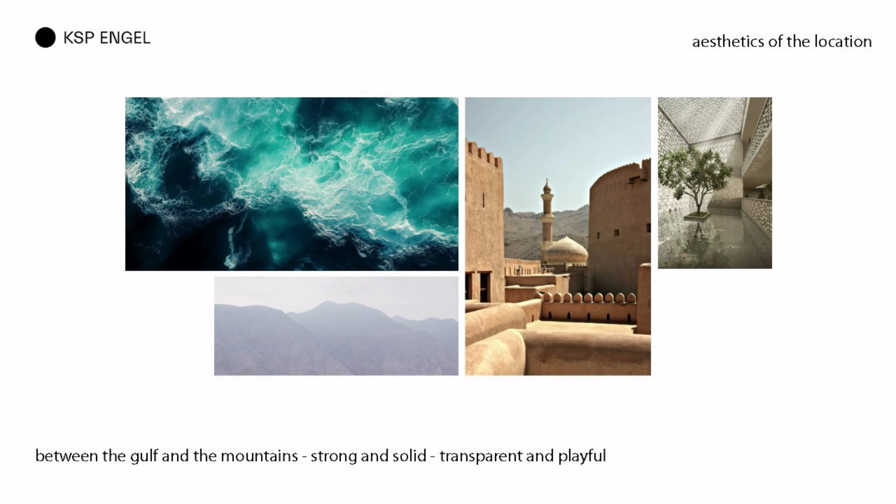We discovered that the buildings are solid and strong, but at the same time we have this Mashrabiya, which is delicate and playful with light and shadow. And we got inspired by these stones, which are so surprisingly different from the inside to the outside.

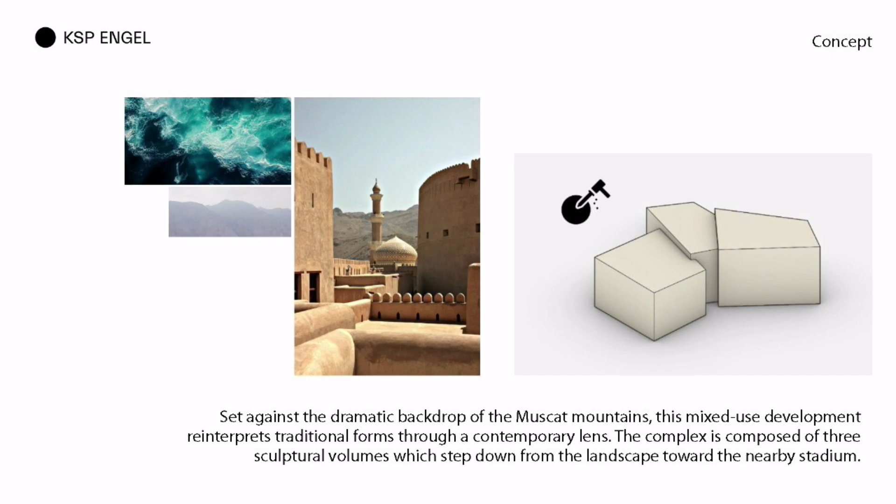We translated this into our concept. We first set, against the dramatic backdrop of the Muscat Mountains, the three volumes. They are stepped from the mountains toward the city, stepped back, creating a scenery, creating a skyline for the project.

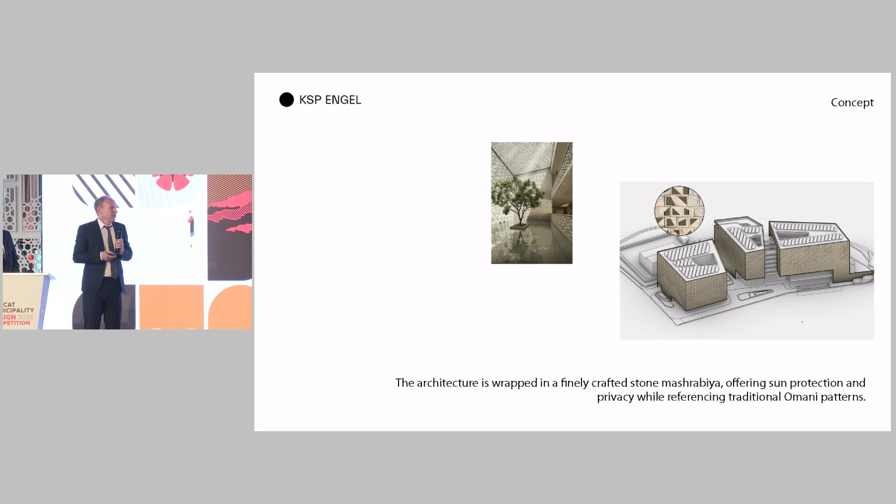Then, in contrast, the complex opens inwards, forming a generous courtyard that acts as the heart of the development, creating a quality of stay. Finally, we wrapped it with this crafted stone Mashrabiya, offering protection, creating an identity which from all sides looks very unique.

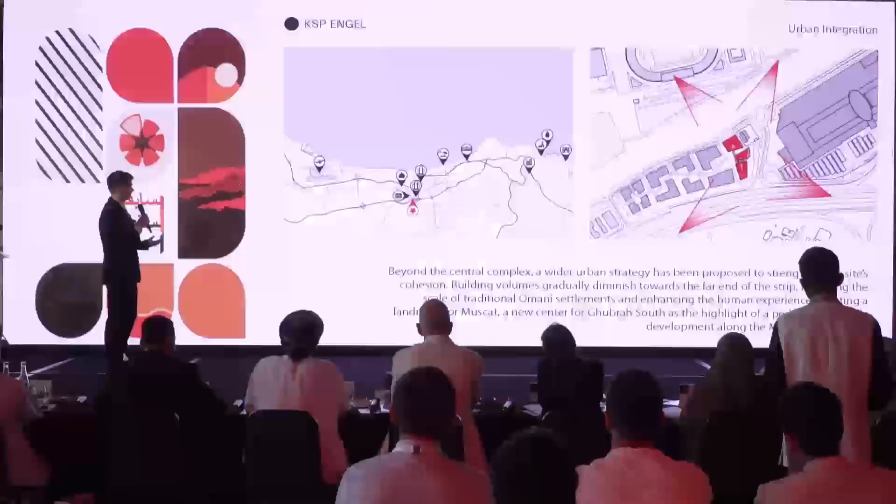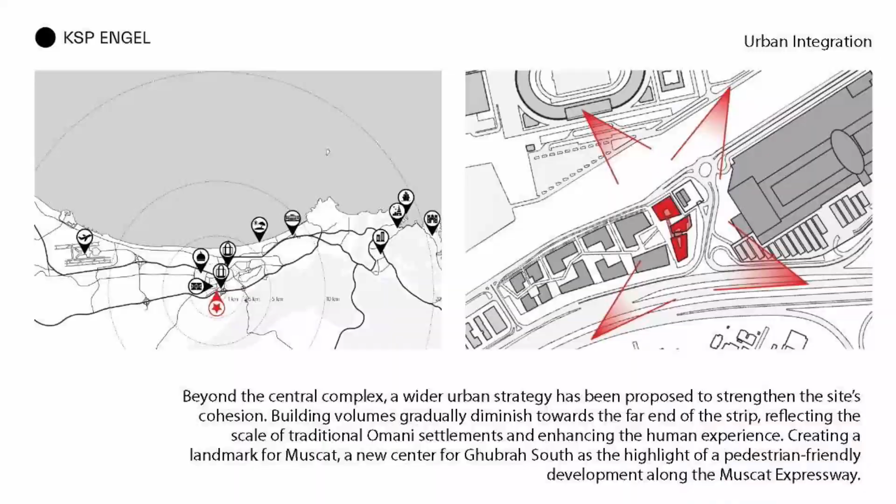Beyond the central complex, a wider urban strategy has been proposed by us to strengthen the site's cohesion. The building volumes gradually diminish towards the far end of the strip, reflecting the scale of traditional Omani settlements as it gets smaller, from the Mall of Oman and the stadium where the national team plays. This enhances the human experience, and at the same time creates the landmark.

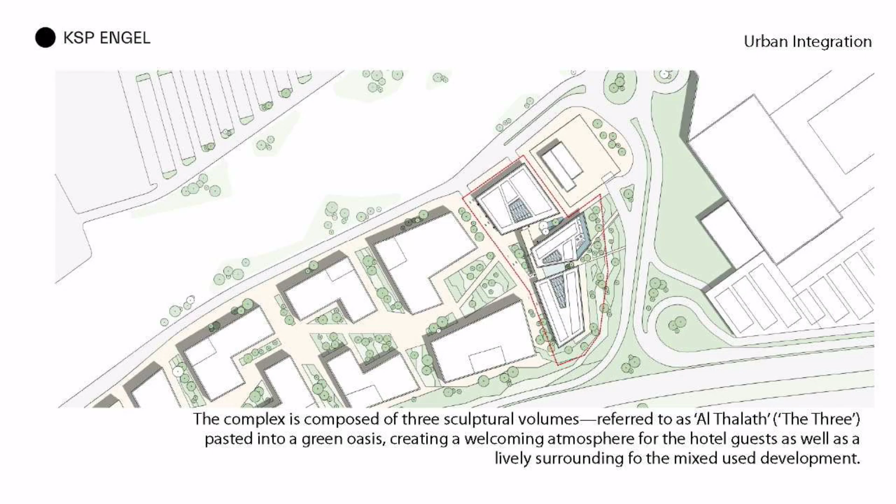For Muscat, the complex is composed of 3 sculptural volumes, referred to as Al Thalath, the three, set into a green oasis, creating a welcoming atmosphere for the hotel guests, as well as the lively surrounding for the mixed-use development.

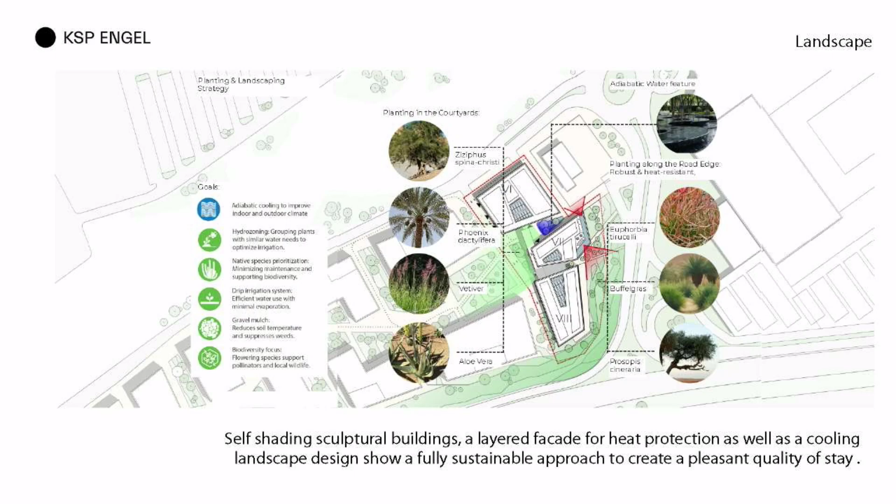Of course, we thought about sustainability. Self-shading sculptural buildings, a layered facade for heat protection, as well as a cooling landscape design show a fully sustainable approach to create a pleasant quality of stay. We thought about adiabatic cooling, hydrozoning for plants, the use of native species, and the prioritization of drip irrigation systems using gravel mulch, and of course a large focus on biodiversity.

Welcome to Al Thalath, the hotel. Let's have a journey together through the hotel.

Coming from the airport, your cab approaches the new central block square via the roundabout next to the Mall of Oman. The car drop-off is covered by a light roof, guiding the way to the lobby of our hotel.

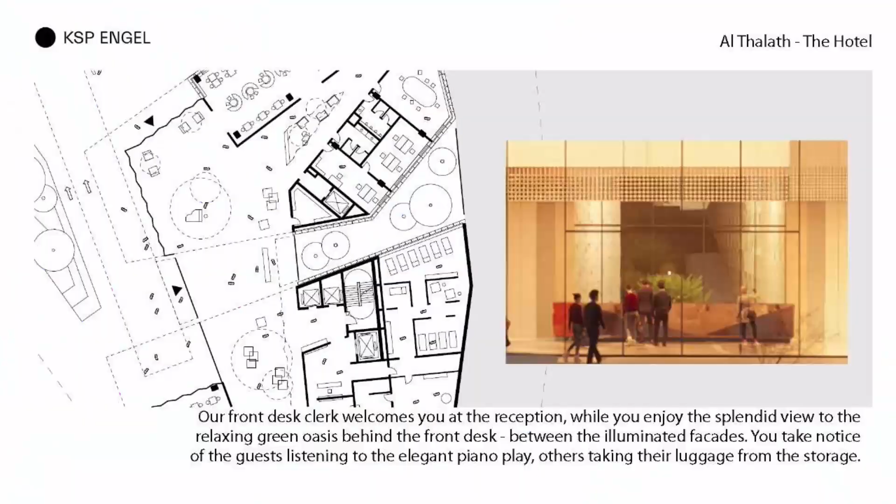Our front desk clerk welcomes you at the reception, while you enjoy the splendid view to the relaxing green oasis behind the front desk, between the illuminated facades. You take notice of the guests listening to the elegant piano play, others taking the luggage from the luggage room.

What you hopefully don't notice is our staff managing the hotel from the back office here.

Maybe tomorrow morning you have a meeting, then you will discover the meeting rooms, or later you will have a drink in our famous hotel bar, which offers also outside spaces to the chilling outside.

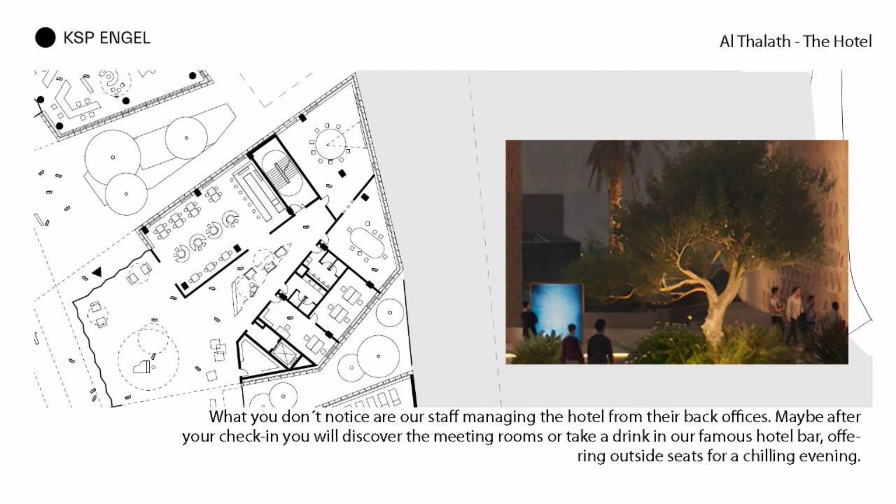Your view turns from the lobby area towards the atrium with its glittering hotel corridors. Let me guide you to the elevators that bring you to your room.

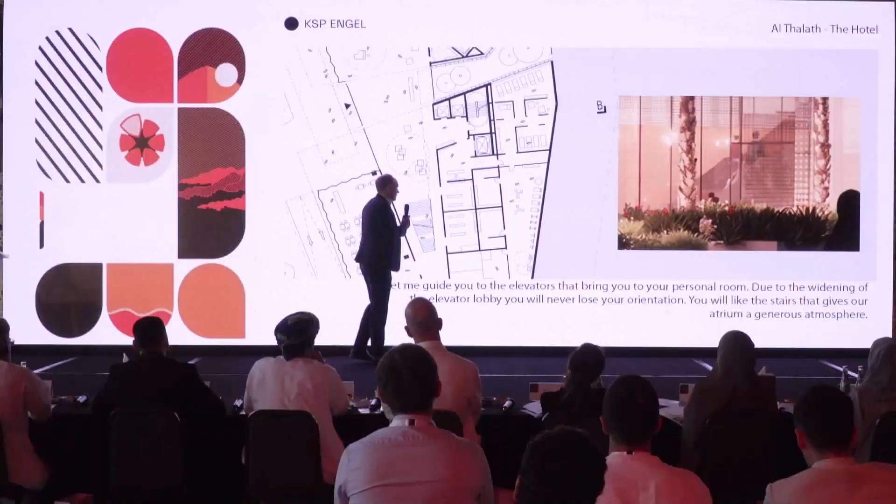Due to the widening of the elevator lobby. You will never lose your orientation. Then you will see the widening of stairs here, which give the atrium a generous atmosphere.

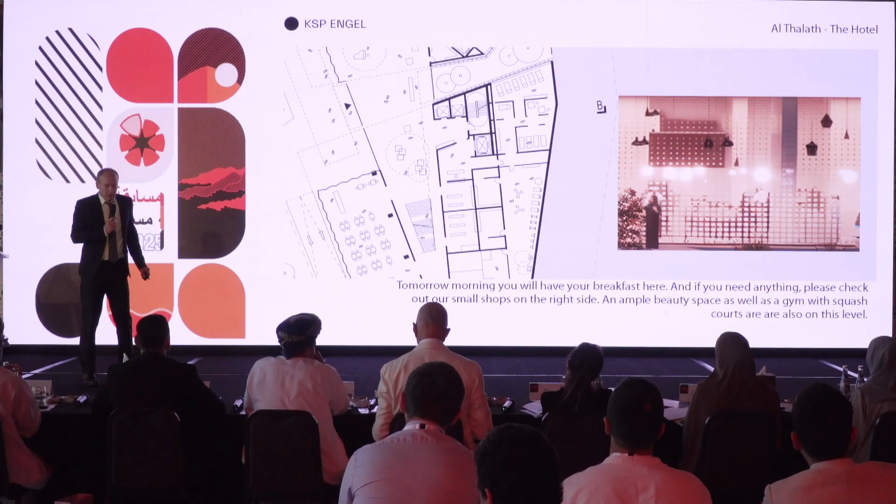Tomorrow morning, you will have breakfast here in this breakfast room. If you need anything, go to the small shops next to the atrium. An ample beauty space, as well as the gym with squash courts, are also on that level.

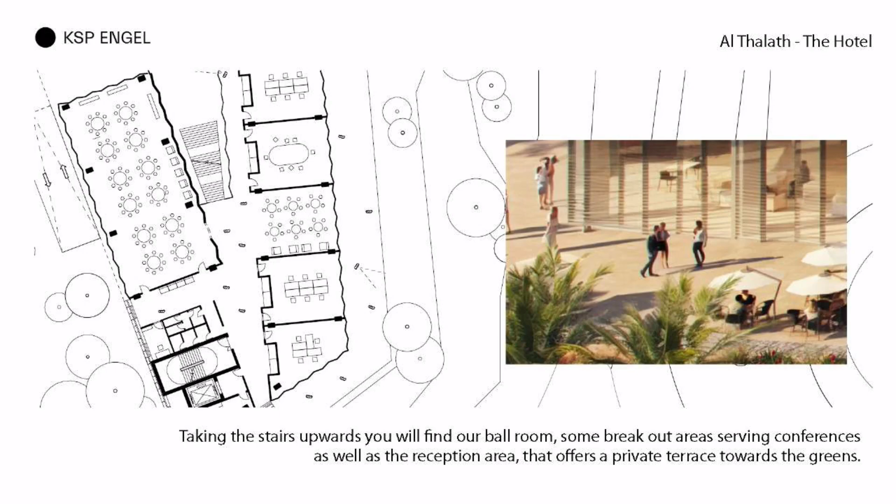Taking the stairs upwards, you will find our ballroom. Some breakout areas serving the conferences, and all with the outside greenery terraces.

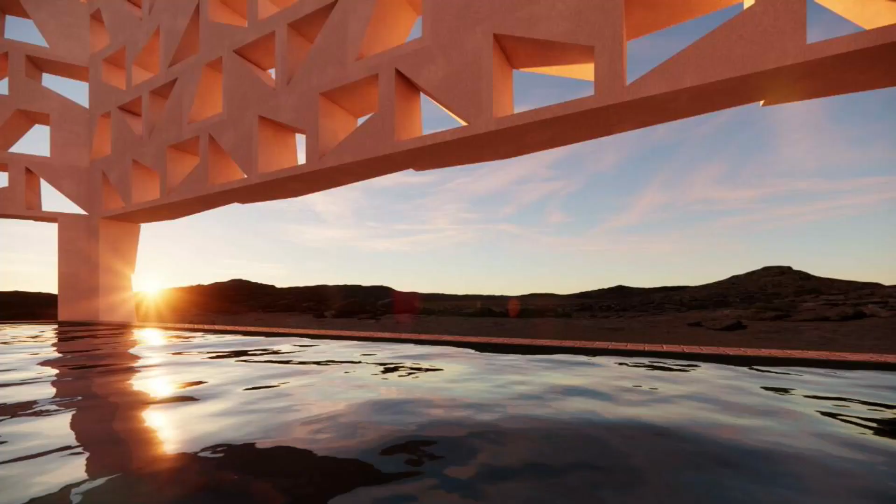Our hotel offers, all in all, 211 rooms and a relaxing spa with a pool on the rooftop. Here you have the view towards the mountains. On the left-hand side, you have the view to the city.

You are crossing the bridge between the 2 volumes. On that side, seeing the mountains. And finally, you come to your room and your view slides to the atrium.

Have a nice day. But don't miss to test our restaurant in the evening.

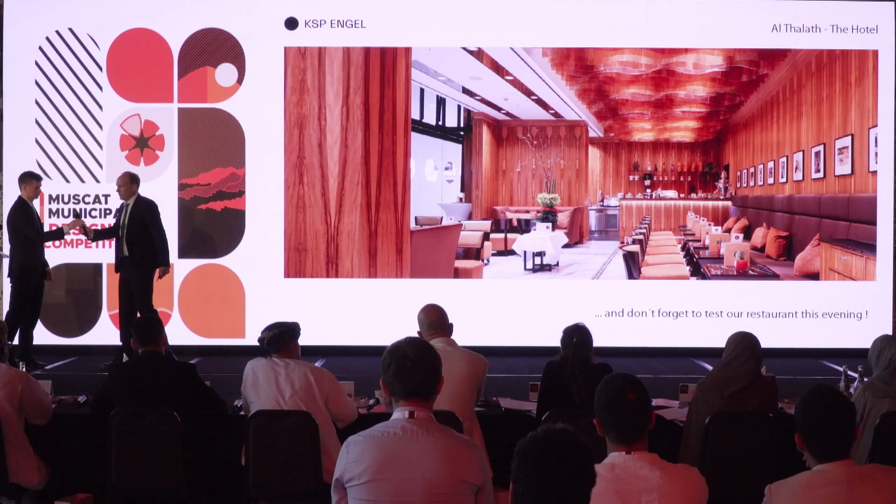So let me invite you to the office at the Al Thalath. From the hotel lobby, you have a visual connection to the office building, creating a new atmosphere of human scale.

You realize this when you come down the next morning and you've just had your breakfast. While you want to go to the office spaces, you see a roof which guides you here,

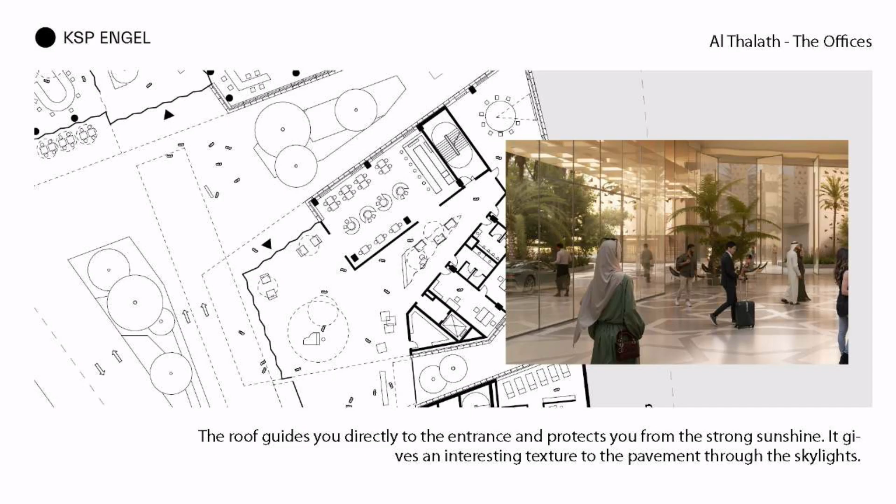reminding you of a Mashrabiya screen which is guiding you towards the office and protecting you from the strong sunshine, and allowing interesting textures to fall onto the ground. An Instagrammable moment, definitely. And while it's hot outside, you feel the chilly wind.

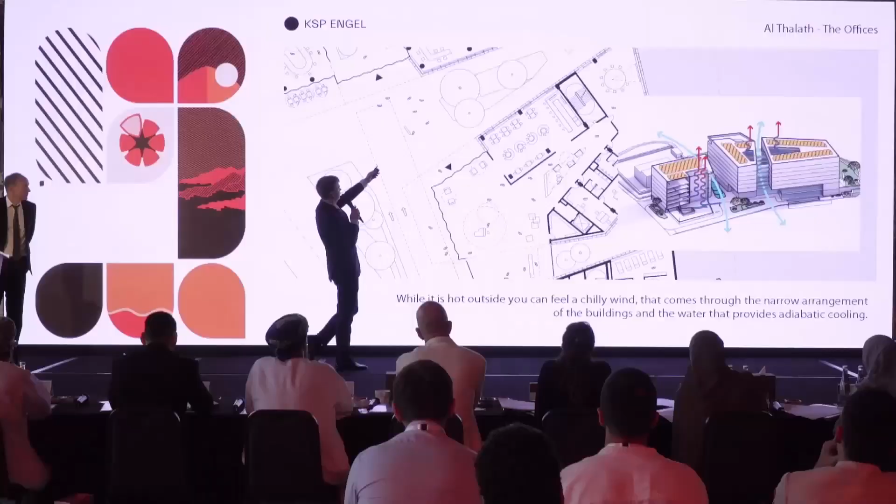Where's that chilly wind coming from? It's coming from this pool of water here, allowing for adiabatic cooling. Isn't that perfect? Just when you have a long day of work and it's really warm, a small refreshment just to clear your mind.

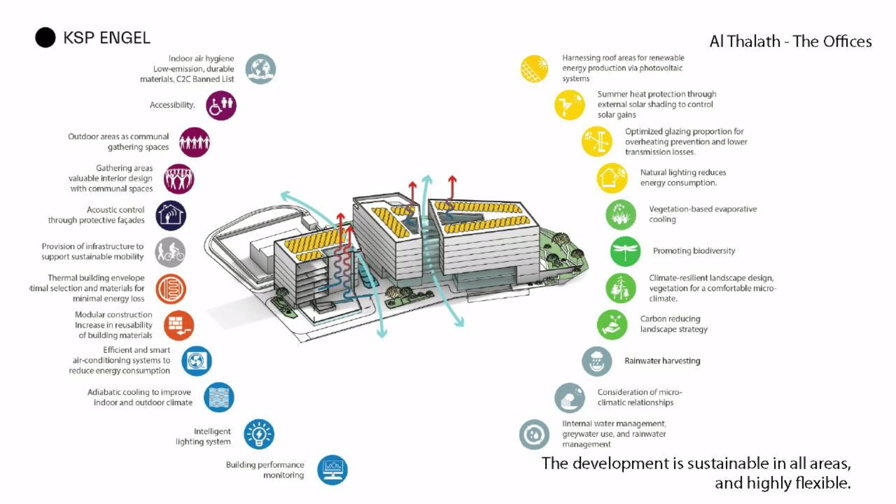And again, you now have entered the lobby of the office, and this is when you realize, wow, it's not just the hotel that is sustainable, the entire complex is sustainable in all areas.

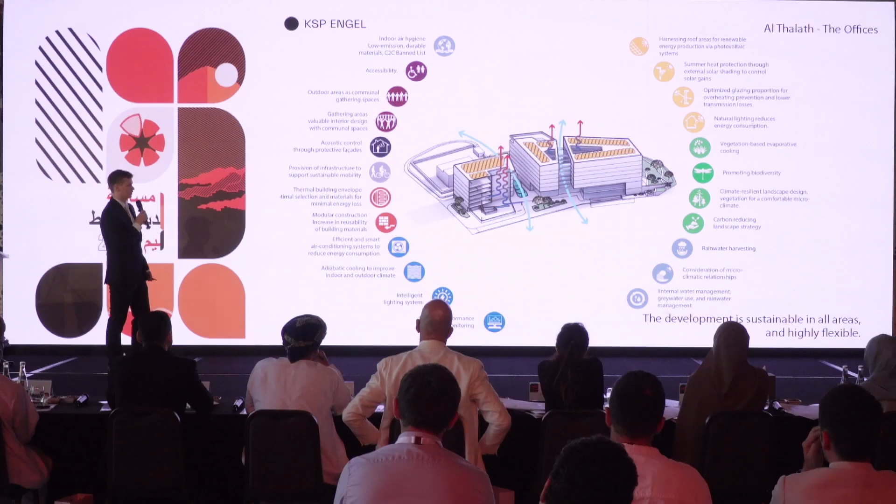And on top of it, it's highly flexible. And as previously mentioned, it incorporates, for example, vegetation-based evaporative cooling, promotes biodiversity, has a carbon-reducing landscape strategy, thinks about rainwater harvesting, and most importantly, it's accessible to everyone.

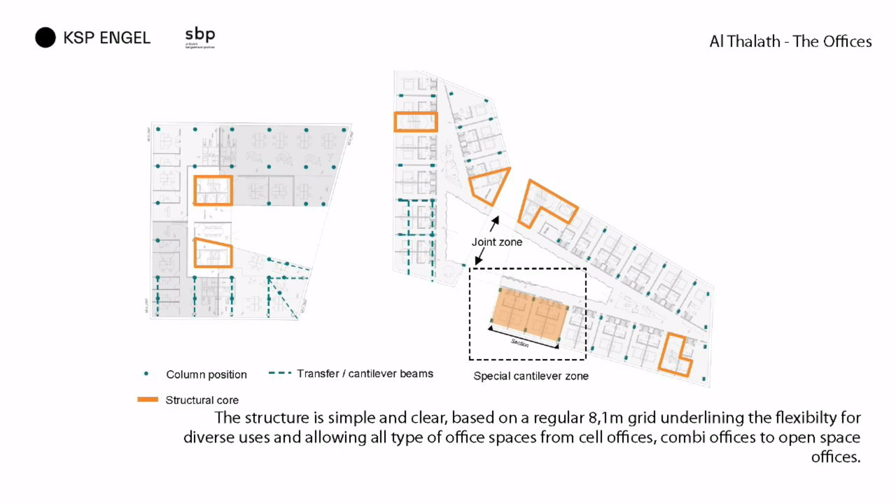While you're standing in the lobby, you notice that the structure is simple and clear, based on a regular 8.1 m grid, underlining the flexibility for diverse uses, and allowing all type of office spaces, from cell offices, combi offices, to open space offices. You also notice that while the hotel had 4 cores, the office has 2 cores.

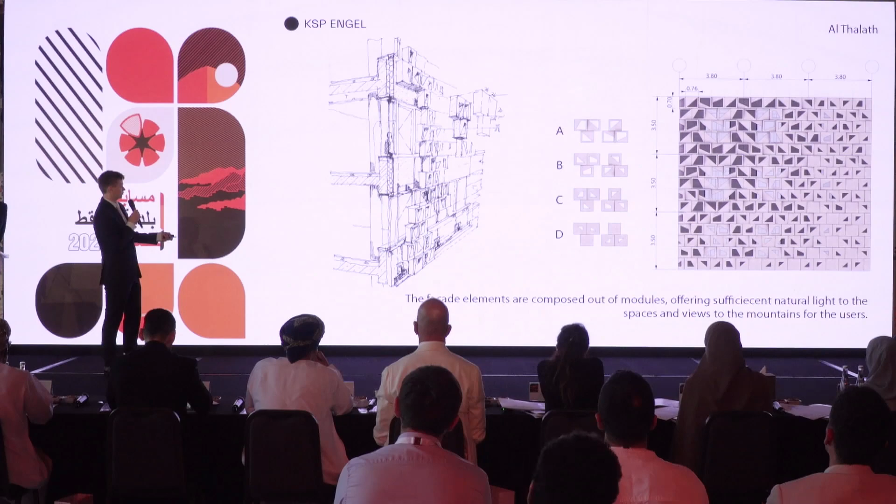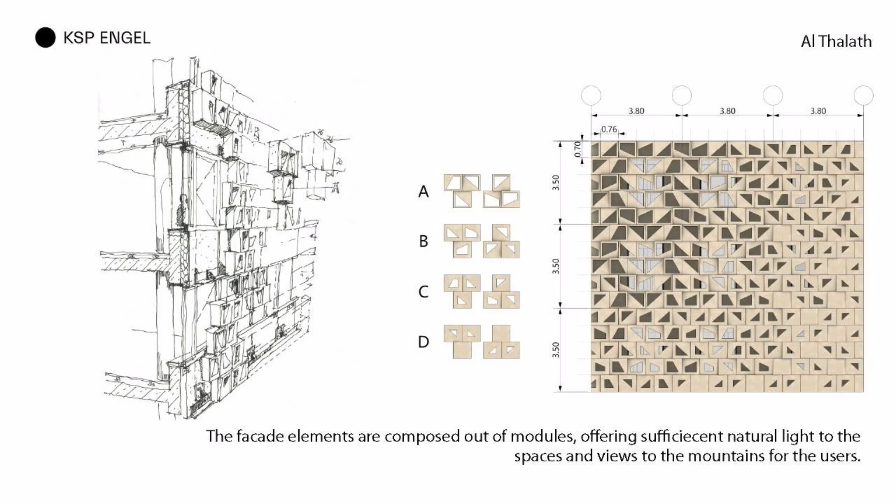Then, while you're in the lobby, you still quickly turn around. You notice now during the day that the facade elements are composed out of modules, offering sufficient natural light to the spaces and views to the mountains for the users.

You also notice that the facade is created out of 4 modules, A, B, C, D, which interlock into each other, like a Tetris puzzle.

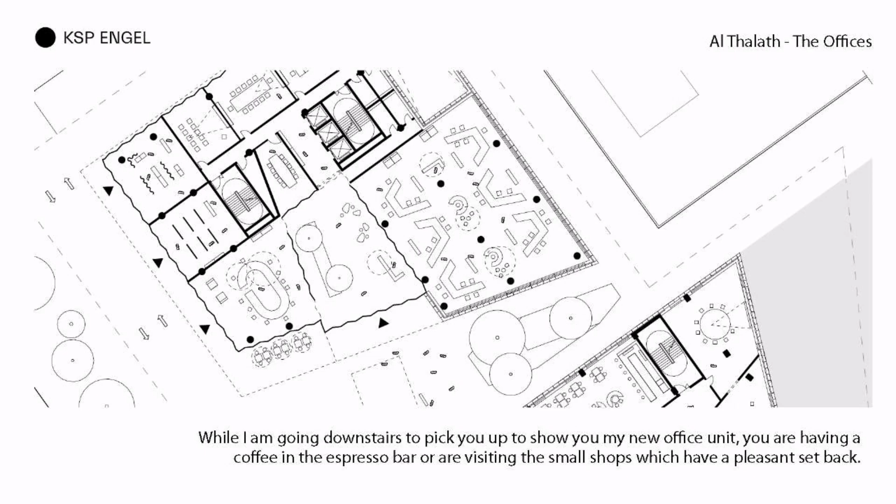And while I'm still in the office, about to go and pick you up, you are having a nice coffee in this espresso bar, or maybe even visiting the shops we have here for you, underneath a pleasant setback which we carved into the building, allowing for a pedestrian-friendly environment.

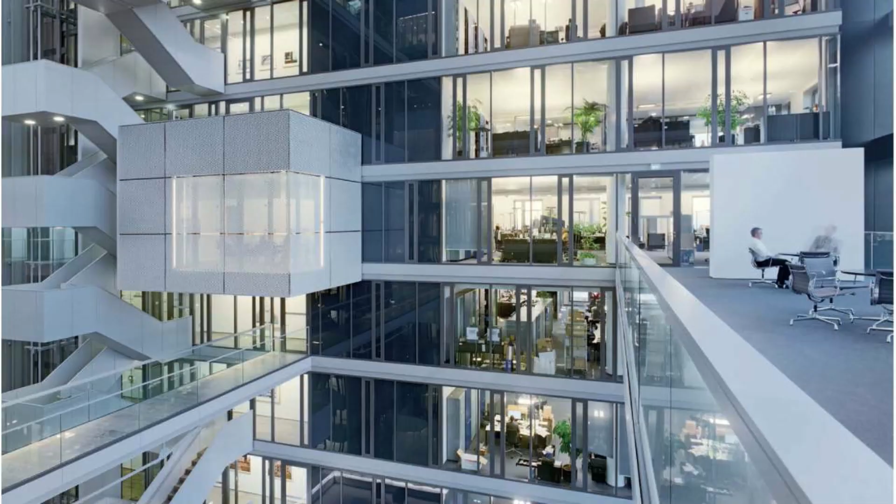And then you think of another KSP project exactly at that moment. This is the stock exchange in Frankfurt, which shows a similar type of lobby space, modern, flexible, forward-thinking. And you really enjoy this timeless, true, and fascinating space.

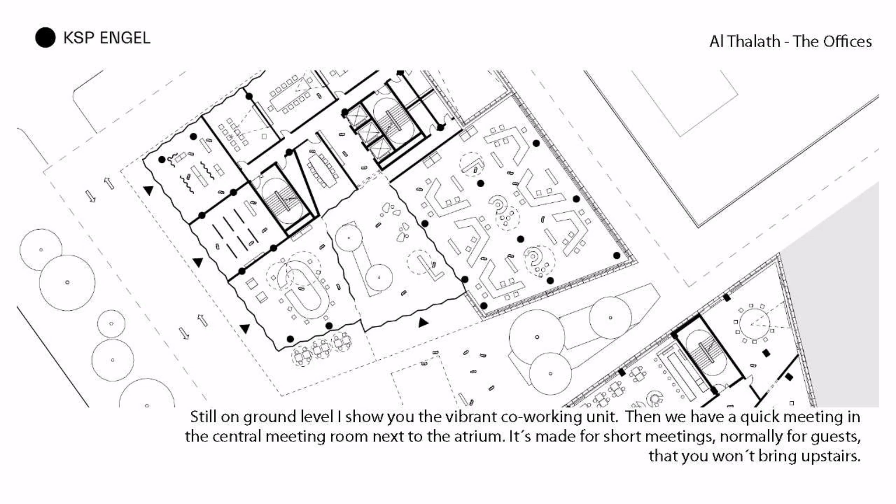And while you're still on the ground level, I show you the vibrant co-working unit here in the bottom right. This is where you could maybe come tomorrow morning after your stay in the hotel to do some work. Then we have a quick meeting in the central room next to the atrium, overlooking the entire heart of Al Thalath. It's made for short meetings, normally for guests you wouldn't bring upstairs, but I thought it's so beautiful I'd show it to you anyway.

So we go upstairs. The elevator unit, the stairs, the toilets, and the kitchens all serve as the backbone of the building. And this allows a total flexible and open office floor plan, which nowadays is highly vital. And look, that's how we work.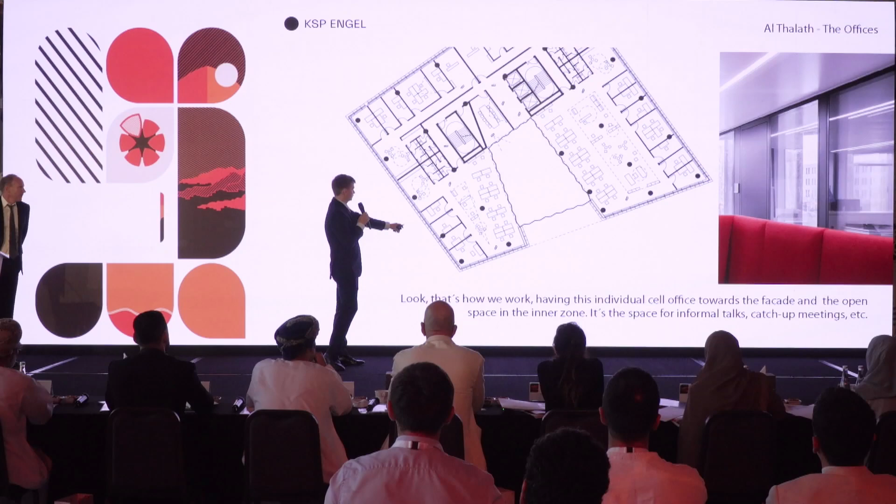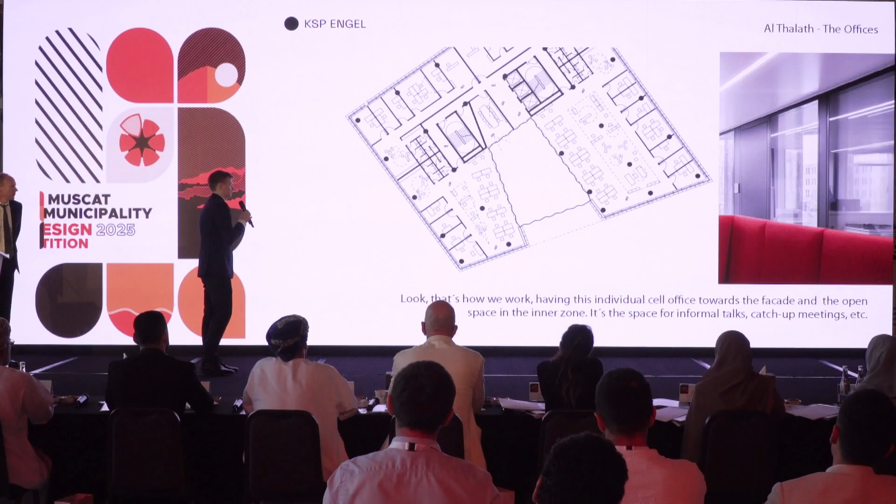Having this individual cell towards the facade, the open space in the middle zone, which is a space for informal talks, catch-up meetings, and so on. And towards the atrium, you have group working zones which overlook the atrium through the crystal heart.

Doesn't this look nice? A space for little informal talks sometimes during your workday. You also realize that each unit has a kitchenette opening to the working area. And we even have a football table in our playful middle zone. Maybe we could have a game later.

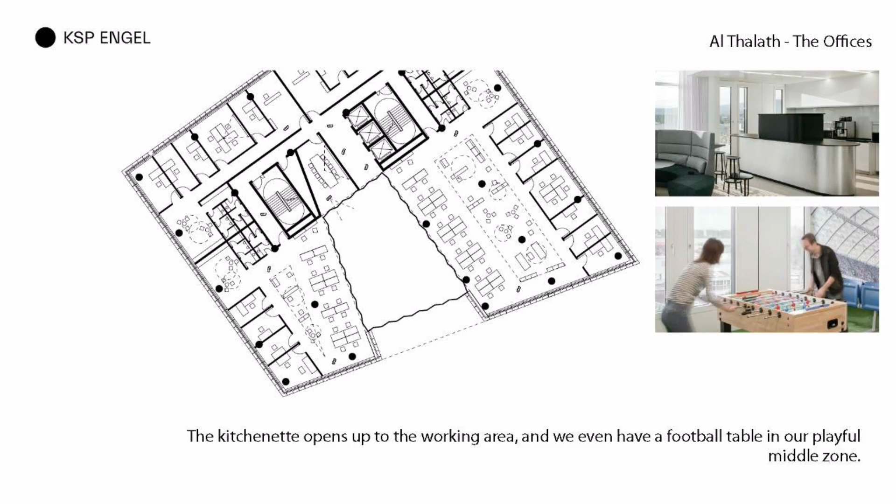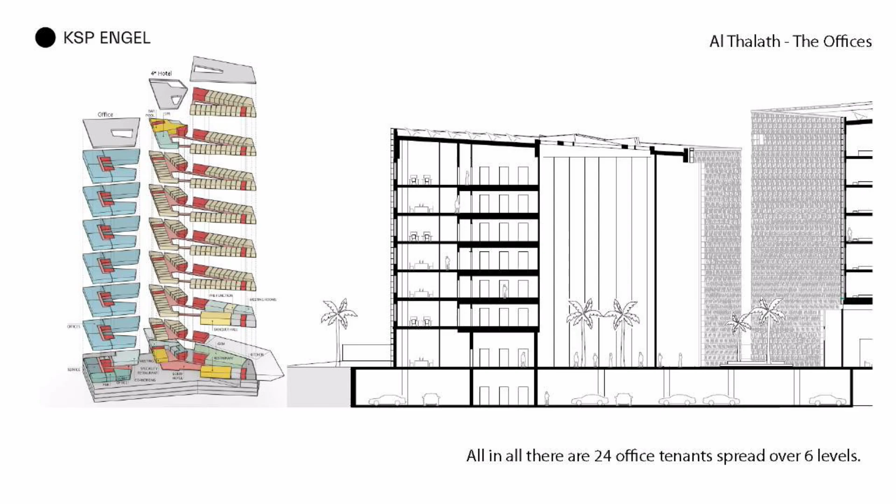So, all in all, there are 24 office tenants spread over 6 levels. And this is what makes Al Thalath extremely special. There could be 24 office tenants, there could be 1, there could be 5, or 6. It's completely flexible. And it could even not be an office at all, it could all be a hotel. And that's what makes Al Thalath so special.

At the end of the day, I take you outside. We go to the courtyards, which we have so carefully crafted, and we look at the landscape and throw the view back to the building.

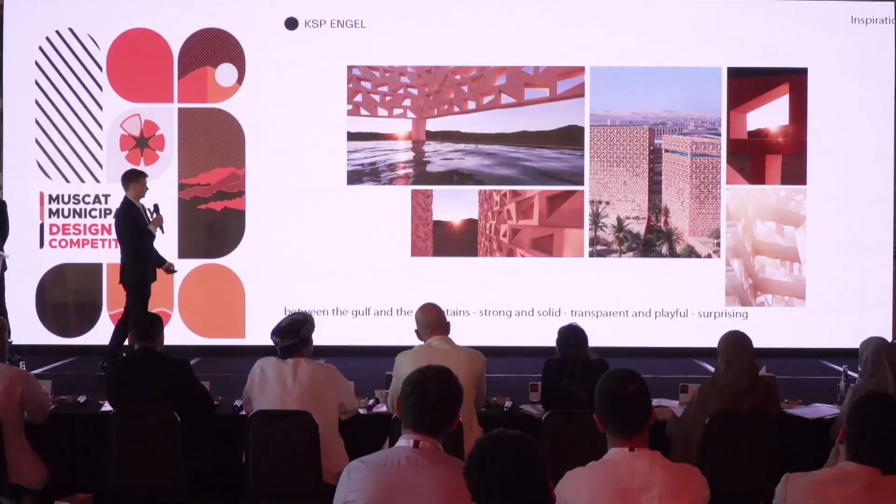So between the Gulf and the mountains, strong and solid, transparent and playful, surprising, we created a landmark called Al Thalath, also known as the 3.

And while you go back to your hotel room and I leave to the left, you enjoy these beautiful views through the facade onto the mountain, and you send a picture to your family in the WhatsApp group chat as the sun gently sets behind and the day ends. Thank you.

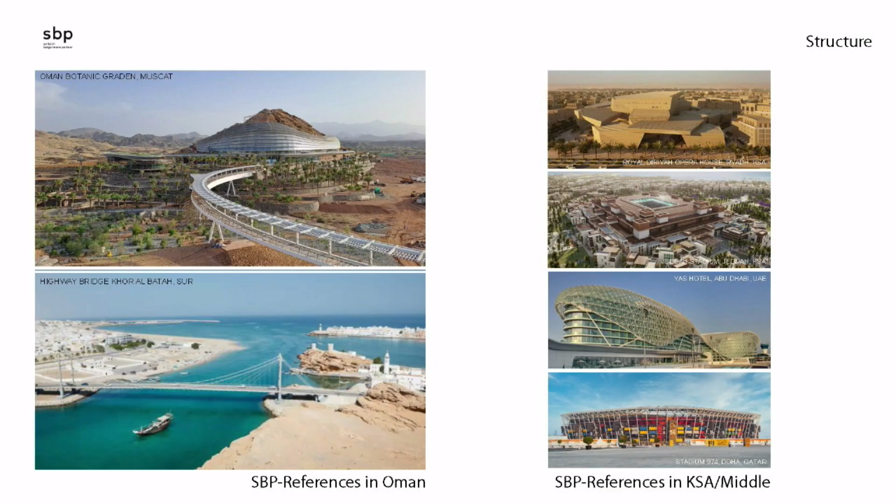Actually, since we still have some time, we brought some reference projects, but maybe it's not so important. I mentioned some before. More important is that we also work together with a structural engineer who has some experience, even here in Oman. They worked on the botanical garden and built a bridge in Sur.

Thank you very much. Thank you, Thomas and Jürgen. That movie was dramatic, woke us all up again.

Shall we kick off with some questions? Can you hear me? Yeah? Okay. Thank you very much for your presentation. It was quite interesting and quite engaging, so thank you for that. I have one question regarding the...